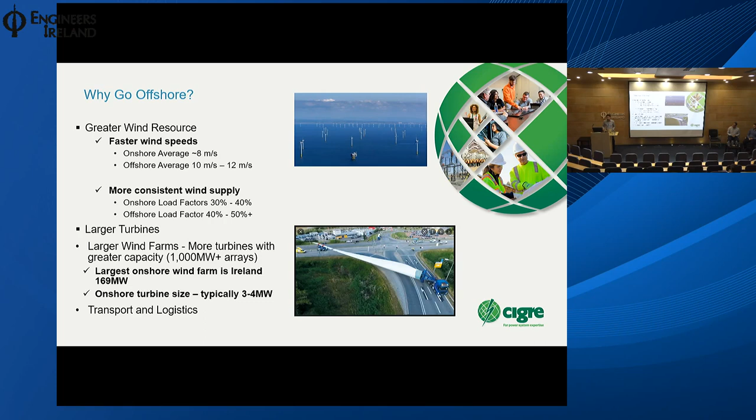Another restriction around onshore wind is the size of the turbines and the transport and logistics piece. As turbines become larger, the tower bases can become so wide it's difficult to transport them on roads - if you're trying to get a tower base 5 or 6 meters in diameter along a narrow country mountainside road, it's just not feasible. Whereas offshore, that can all be placed on a barge and shipped out to the install location.

So what's ESB's interest in this, or why are we looking into it? ESB recently launched its net zero strategy with the target of being net zero by 2040. A key milestone on that journey is to have 5,000 megawatts of renewables by 2030, and 2,500 megawatts of that is planned to be from offshore wind - 50% of the overall volume of renewables that ESB owns and operates.

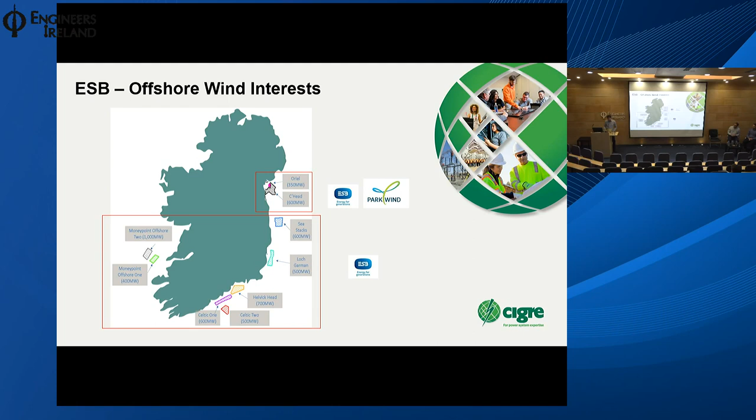You can see on the west coast there are 2 projects, Moneypoint 1 and Moneypoint 2. They're both intended to be floating foundation projects, and they're part of the overall Green Atlantic project. This is something ESB launched probably in the early part of last year, a strategy to convert the Moneypoint power station, ESB's coal burning power station in West Clare, into a hub for offshore wind and floating offshore wind. The first phase involves using the existing deep water jetty there and repurposing a lot of that to allow it to house and assemble components for turbine foundations.

Further on from that, there are plans that it could be used as a hydrogen hub for production of green hydrogen. I'll touch briefly on hydrogen a little later, but green hydrogen is seen as a potential solution to the likely over-generation or oversupply of wind energy in Ireland, particularly coming from offshore wind.

So in terms of offshore wind and the Irish sector, Conor mentioned there's one offshore wind farm in Ireland, built all the way back in 2004 - the 25 megawatt Arklow project, a demonstration project built by Airtricity and GE. This was back in the very early days of offshore wind, and it was almost to see what's technically possible, what can you do. That was the only project that went in, and since 2004 there's been no other offshore wind farm installed around the island of Ireland.

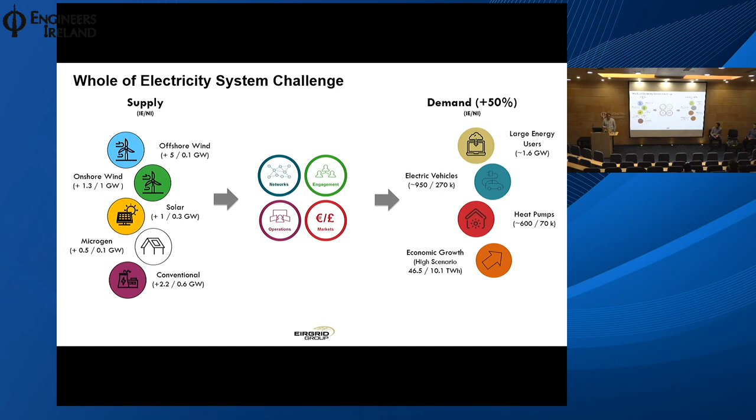And on the demand side, we're seeing a rapid increase in the demand level, so somewhere of the order of a 50% increase in demand. And that's driven, like I said, by large energy users, so data centers, and also the electrification of electric vehicles and heat pumps.

So where is this demand and generation situated? Well, I'll just focus on a few things on the demand side. You'll see that the large energy users are located primarily in the Dublin region, but based on feedback out of the consultation, we also assumed some of that would shift out to the Midlands and to the south. So that's about 300 megawatts in the Cork, Limerick, and Galway regions.

And then focusing on the generation side, you'll see that the majority of the offshore wind, like Connor has just discussed, sits along the east coast, and then we also, at the time, assumed some on the south and some on the west, and we're refreshing these assumptions in the next iteration.

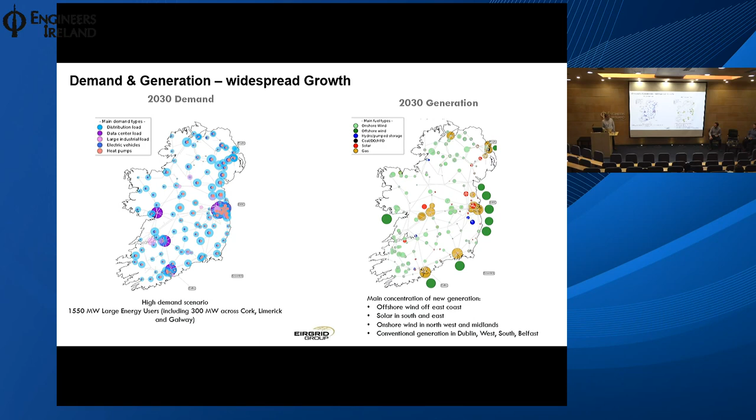Onshore wind is located mainly in the northwest and the Midlands, and solar in the south and the east, and then conventional generation in the Dublin region, the west, the south, and in Belfast.

So our analysis showed us that there were approximately 50 new projects that we needed to progress through the relevant grid development frameworks in EirGrid and in SONI. So there were actually 52, and I'll break those down in the next slide.

But the way that we structured our analysis is we try to maximize the use of the existing grid and to focus on publicly acceptable deliverable solutions. And you'll see here that there are aspects of those various approaches from the consultation that I showed previously.

So, like I said, we need significant new grid infrastructure. It's very complex and contentious, and it takes many years to deliver. And this is a key holding point on meeting our target.

You would have seen from a recent report from Wind Energy Ireland, in order to meet our carbon budget targets by 2030, there's an urgent need to progress these projects as quickly as possible. And that's why the engagement pillar is so important. We need timely consent to progress these projects.

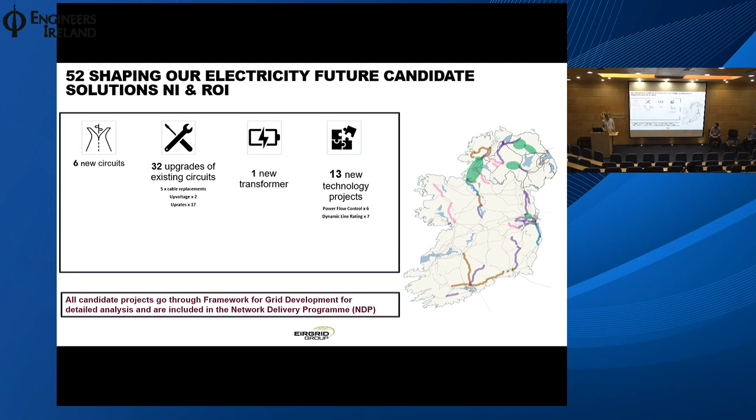And those technology projects are the power flow controllers and dynamic line ratings.

So in summary, the Shaping Our Electricity Future provides a robust economic and deliverable plan for 2030, and it's just a step on the way towards our transition to a net zero energy system. It was the first iteration of this project, and we're currently refreshing our assumptions, and we will update it towards the back end of the year. Our solution accommodates social and economic growth, and it also facilitates a secure transition from a non-renewable to renewable-based system throughout the decade. I think that's it for mine, so I'll hand over to Darren.

Good morning everyone, my name is Darren Reap. I'm an offshore wind engineer with ESB, and I've been involved in the industry for about 4 years. I'm currently in the process of being seconded over to the Inch Cape project that Connor alluded to earlier, as a transport and installation engineer. I am a civil engineer by background, so it's influenced my presentation. I do talk about some electrical equipment, and I understand there's expertise in the audience on that area, so feel free to heckle where required.

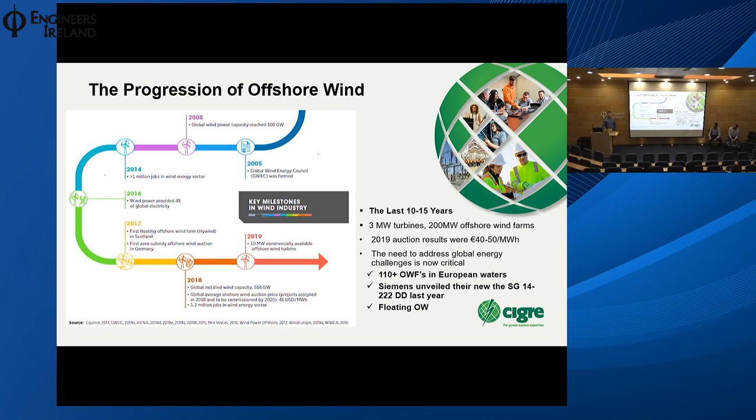But where we are at the minute, the average distance for an offshore wind farm now being chosen in the UK and Ireland is I think 60 kilometres offshore, so you're talking about water depths well over 100 metres, and that's where the industry is going - floating. There's 110 offshore wind farms off the coast of Europe currently, or just over that, and the largest turbine off the shelf that you can purchase for a development now is 14 megawatts.

The capex for fixed foundation solutions can be very high because there's an awful lot of steel. You're in water depths up to 70 metres, they're large structures, there's a lot of steel and a lot of fabrication intricacies in the development. Transport and installation costs can be quite high because it's not a matter of just dropping them out there - you have to get a vessel to bring them out, and a vessel to install them, and these aren't cheap, I'll go through that later.

But critically, the technology exists to install a large turbine on a fixed foundation out at sea. The bigger the turbine, the bigger the project capacity, and the bigger the project capacity, financials are happy. The opposite side then currently is the floating solutions.

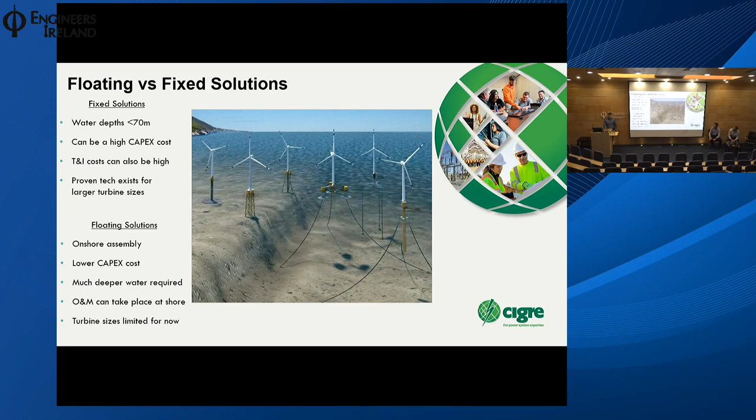So where we started with fixed foundation solutions was a gravity-based structure, a simple, large concrete unit, up to 4,000 tons in weight probably. That just sat on the seabed supporting the turbine, and it resisted all the wind loading and the metocean loading out at sea.

Strangely enough, it's termed a craneless technology because you don't actually need a crane to install it. You can float it out, add ballast to it out at sea, sink it onto the seabed, and there you go.

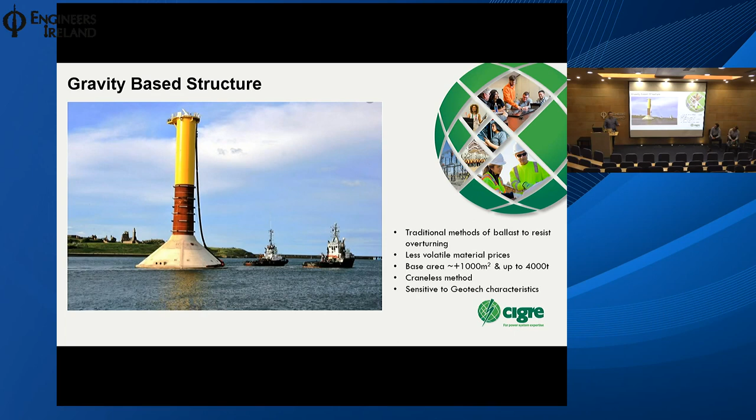It is quite sensitive to geotechnical characteristics just due to the weight of it, and it's also limited by water depth. I think the deepest one installed was at Thornton Bank offshore wind farm, at 30 metres water depth. So as we progress further offshore, they're not really a solution that's thought about too much, but they do make good photos if nothing else.

Where we are now with foundations is monopiles. Monopiles are the go-to foundations. They're simply a large steel cylindrical tube that's brought out to sea, upended, dropped to the seabed, and installed. There's a lot of engineering understanding with these, and they're maybe the preferred method currently.

Traditionally they were used in water depths up to about 40 metres, and there was an opinion that they couldn't go any deeper, but new radical engineering solutions have now increased that up to about 55 metres. But because of the bigger water depths, you're looking at bigger diameters and bigger weight.

The monopile shown on screen is from the Yunlin wind farm in Asia. It's about 11 metres in diameter, I think 110 metres in length, and about 2,000 tonnes, and that's just one unit. So as I said, they're the first choice solution up to 50 metres water depth.

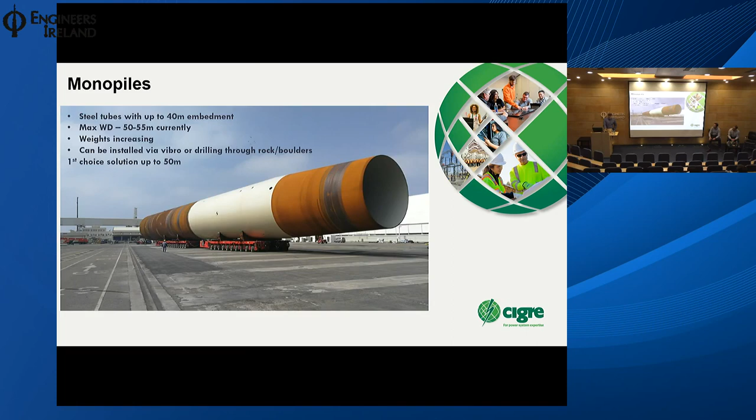After that, you're in jacket foundation range. A jacket foundation, as you see on the left of the screen, is just a steel lattice structure. It's leaning on well-established engineering understanding in the oil and gas industry, because these are the foundation solutions that would have been used on a one-off offshore rig.

But as we move into serial production required in offshore wind, the jackets aren't as big, but there's a lot of steel, and because it's in serial production, you might have 50 or 60 turbines, 60 foundation units. There's a lot of welding and intricate fabrication, and quality checks, which slows down the process, and as you slow it down, you increase the cost.

These are just lowered down onto the seabed, onto pre-installed piles usually, so these are just mini versions of the monopiles, usually in a 3 or 4 pile layout. So fabrication costs can be quite high.

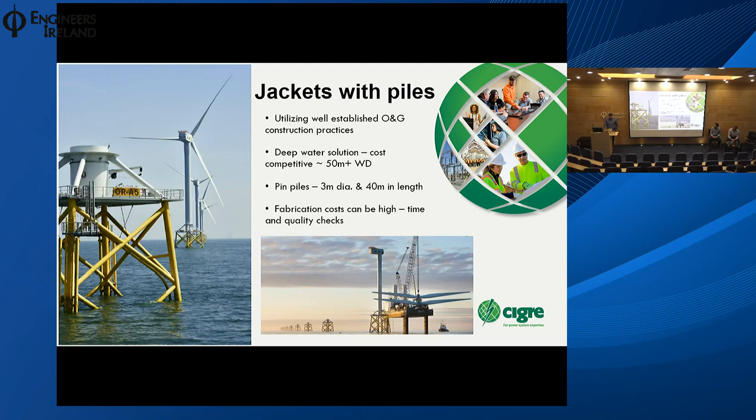So how do you install one of these? Well, you need heavy lift vessels. They are huge vessels that basically transport the foundations out to their desired locations.

The image on screen shows a monopile installation. The monopile would have been brought out on the deck of the ship, transported out horizontally. It's upended by cranes, huge cranes you can just see out of screenshot, and it's lowered in off the side of the vessel through a pile gripper.

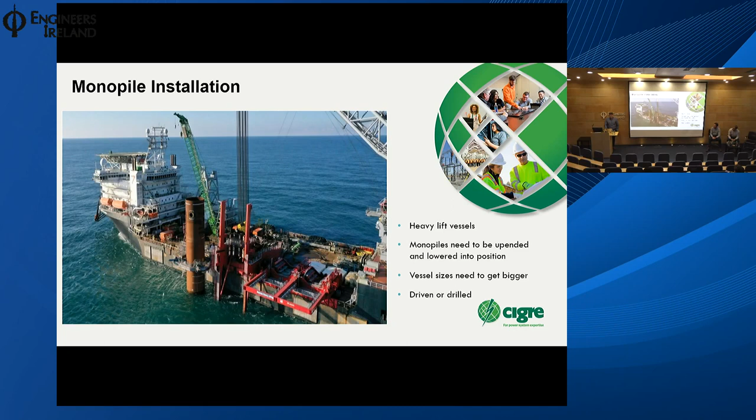And these vessels aren't cheap. You're talking about in excess of £100,000 per day just to rent one of these vessels. And when the monopile is hanging off over the side of the ship in the pile grippers, you drop a hammer or a vibration hammer onto the top of it.

This is one by Menck, and basically it's a hydraulic hammer that falls across a steel plate that's inside there, which distributes the force evenly across the monopile and forces it down.

Alternatively, if you encounter hard rock or hard substrate, which isn't what we desire, you can drop a drill, shown in the images on the right of the screen, down through the monopile. As the schematic shows, it can drill out the rock or hard substrate from the inside, easing the process of putting the monopile into the ground.

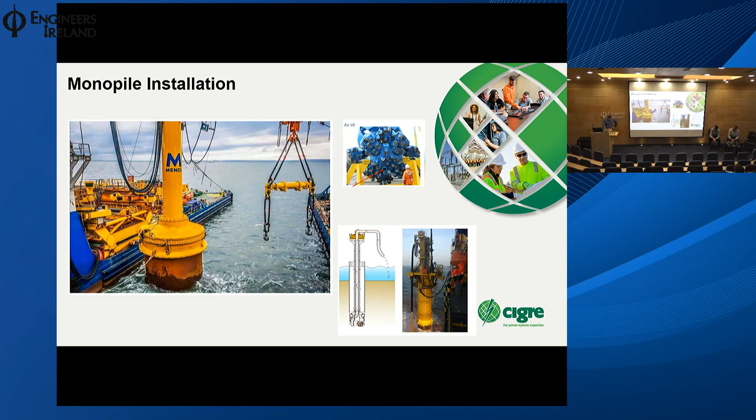So, offshore substation and electrical infrastructure. Simply put, offshore wind electrical infrastructure usually incorporates a centrally positioned substation within the wind farm boundary, linked to all the turbines via inter-array cables laid out in individual strings or tie-in loops. These feed back into the substation, and the power is then transferred to an onshore substation along the coast, usually via the export cable routes.

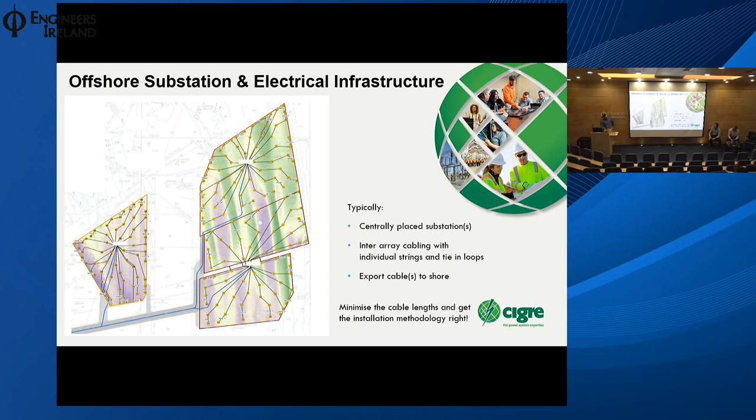Cables have been a point of large claims in offshore wind farms, so there's huge pressure to get the methodology right for installation and reduce cable lengths. It's a costly side of the development. With offshore substations, they're not small units.

They're usually multi-deck structures. I was at one, got a tour around - I finished one about a month ago in Rotterdam. Just to give you an idea, similar to the one on screen, it was about 40 meters square in plan, and I think the one I was on was like 4 or 5 levels high.

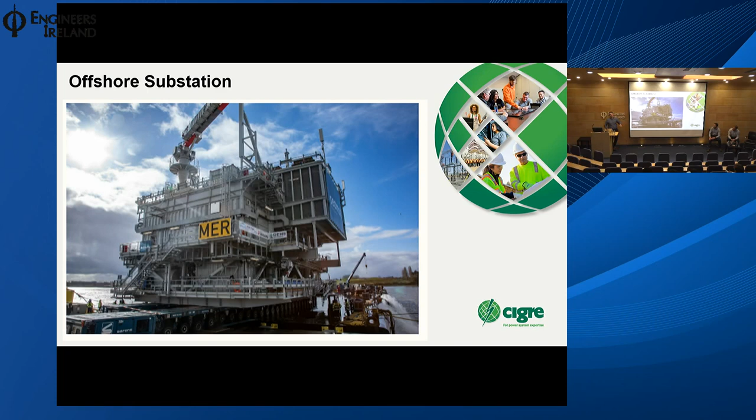These are usually transported to the quayside by what's called an SPMT, a self-propelled modular transport. The image mightn't show up too clear, but it's like a trailer system with loads of wheels, and it's transported to the quayside where it's lowered onto a barge and towed out to sea.

The usual makeup of the substation - you know more about this than I do. The substation elements of the offshore platform: the substation electrical elements are usually on the upper deck, and the lower decks are kept for cable tie-ins, export cable routes, and auxiliary systems.

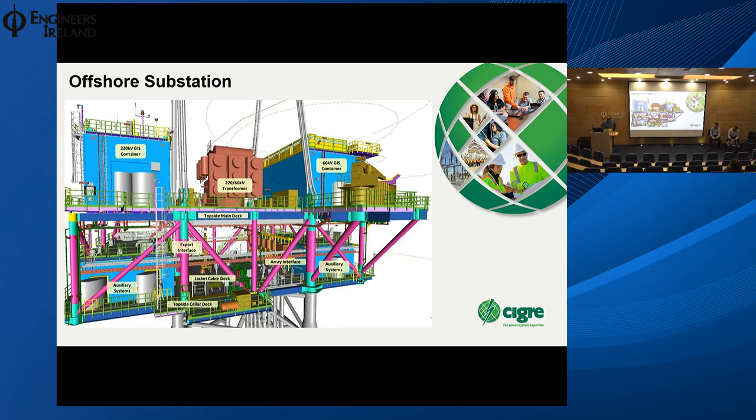Again, to lift - the substations aren't small, but they're bigger than turbines, so you need bigger vessels to install them. Some of these vessels are absolutely huge, with lifting capacities of about 10,000 tons.

The substation could be up to about 3,000 tons, but they make it look like it's a toy, just lifting it up and swinging it around. It's very, very impressive.

These vessels cost over €200,000 a day to rent to install your substation, so it's critical that you get your weather windows right and there's no delays, because 200,000, or up to €300,000 a day, is a very expensive thing to get wrong.

Just a quick little story about the vessel down here on the right of the screen. This is the Heerema. The story is actually related to the sister ship, the Sleipnir, that we have engaged in one of our Scottish wind farms. I was at a talk recently, and one of the people working there said the captain and one of the workers are very good friends, they played basketball together. I was like, well, they're different nationalities - where did they cross paths to play basketball? They said, oh no, there's a full basketball court underneath the deck, along with a full gym and cinema room and all that. So it just gives you a feel for the size of these structures.

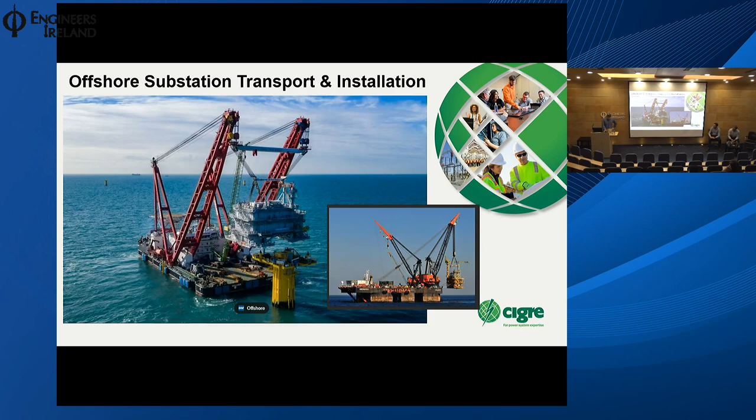Offshore cabling - you probably know more about this than I do. It's either HVDC or HVAC systems. We're seeing HVDC systems being incorporated into offshore wind development design now because the offshore wind developments are getting pushed further and further offshore - in excess of 100 kilometres offshore. A lot of the low-hanging fruit sites on nice sandy banks close to the coast are gone, so we're moving further and further offshore.

But with HVAC, you have to incorporate a reactive compensator system. I actually don't know what they are, but all I know is that I have to pick a location to put another jacket structure to support one intermittently on the cable route to shore, maybe 2 extra foundations. The array cables are typically 66 kV, even though I think I saw something on LinkedIn last week about technology increasing that, but I don't really know too much about it.

Dynamic cables, yeah, with floating wind, I'm not sure if the technology has caught up yet. I think with floating foundation solutions, we're still incorporating a fixed foundation substation, because when you have a dynamic cable tie into a moving structure, it's putting undue stress on the cable connections, and cable issues can be quite expensive. But like everything, the technology will come around. It mightn't be ready now, but it's just around the corner.

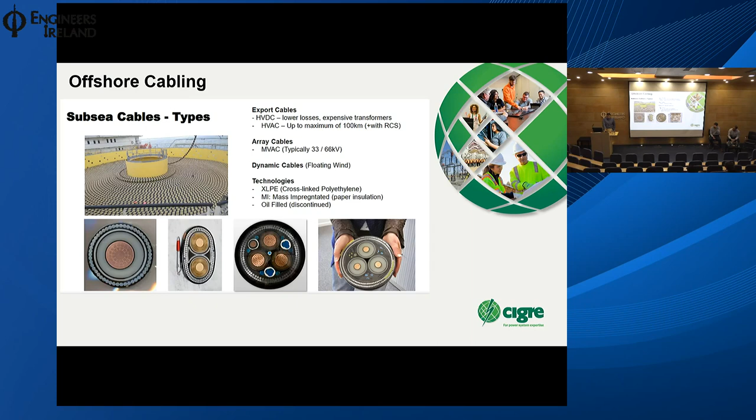With offshore cabling, it's not just a matter of putting these big spools of cable onto the vessels and dropping them into the seabed. Often you need pre-installation surveys just to see what the seabed is like, through geophysical means.

So you pick up any boulders, debris, shipwrecks, UXO, which would be unexploded ammunition. If you're along the east coast of the UK, going back to World War I and World War II, there's a lot of ammunition dumped on the seabed, so you have to check for that.

More often than not, you need a clearance campaign prior to cable installation, which the schematic at the bottom of the screen shows. It shows a grapple lifting up maybe a large boulder, and a boulder plough being towed, which clears off the seabed for whatever cable installation technique you then incorporate.

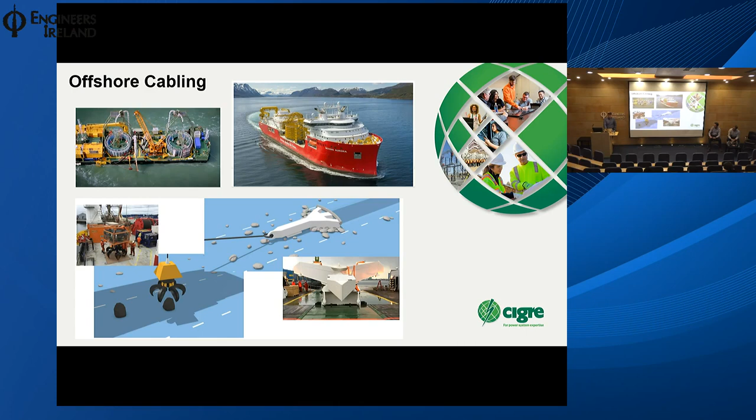Then just start winding things down.

Along the east coast and the south coast, you have a more gradual increase in water depth, so it's not as sudden. That opens up a whole lot of area for monopile use and fixed foundation solutions. You can move your site location further from shore, and the further you are from shore, the less landscape and visual impact, and fewer planning issues you'll encounter. So it'll be a fixed foundation solution market down along the east coast and south coast.

There are very harsh mid-ocean conditions off the west coast in the Atlantic - strong waves, strong winds, currents. As the floating industry evolves, it might be a case of letting it evolve - it is evolving in the UK - and taking the lessons learned to apply to whatever developments get the go-ahead off the west coast. But the way offshore wind is going, that's only a few years away, not decades.

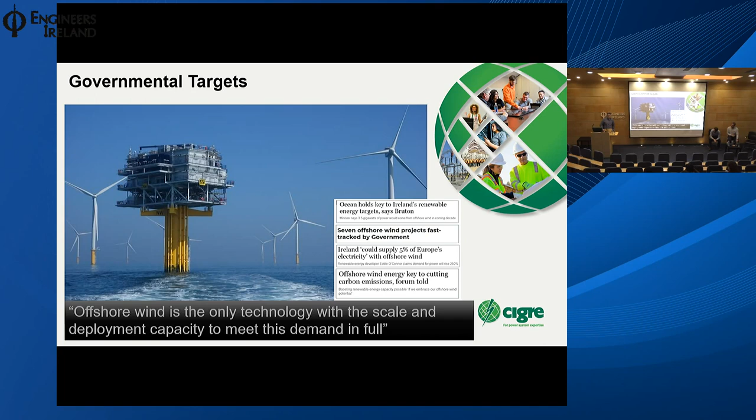Now it is good to have a diversified range of renewable energy production through solar and onshore wind, but I think this quote from the KPMG energy report last year is key: offshore wind is the only technology with the scale and deployment capacity to meet this demand in full, the demand being our energy targets.

So I'll leave it there. Thanks very much for your attention.